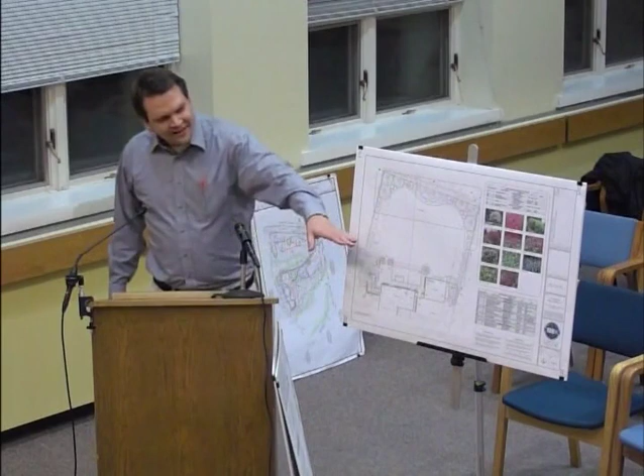The soil scientist did his testing and told us that the wetland line is basically right at the back of the garage, which means the entire back lawn was deemed wetland.

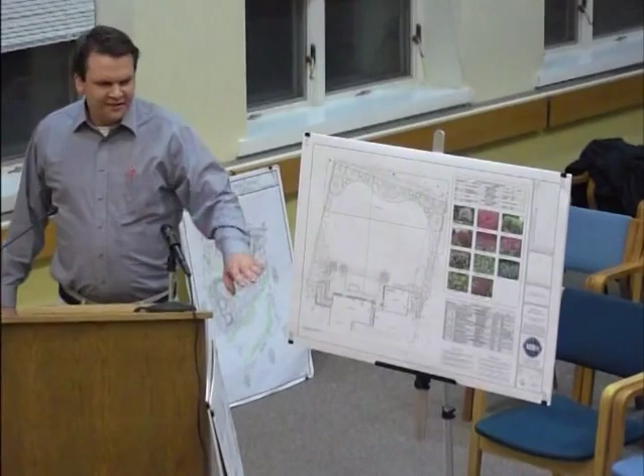There's three main things we'd like to propose for this project. One is a swimming pool tucked up against the back of the house, a vanishing edge with a spa and an auto cover, very nice. It's really going to be taking the place of the existing patio that's there now.

The second component would be a very nice and extensive wetland mitigation planting plan. We're going to remove a lot of invasive plants like wineberry and Euonymus from the site as a whole, do a very nice, beautiful wetland planting along the back, and also redo a lot of the plants around the house itself.

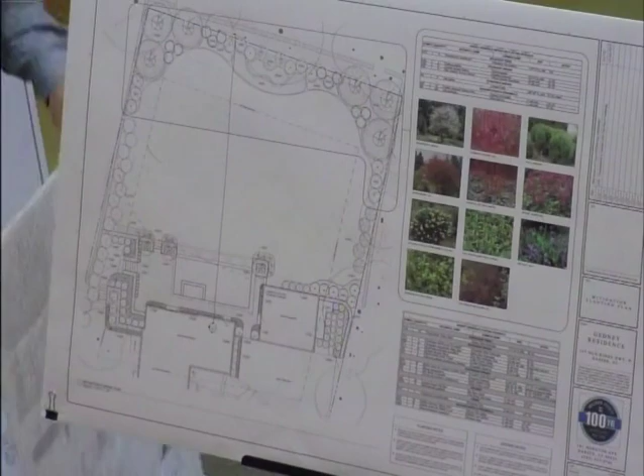The third proposed component of the project is this very extensive drainage plan. The site was not as simple as just throwing some Cultec in the ground like so many projects. This is a little bit more than that.

Right now, the way the site drains, the entire property drains to the backyard. The water just pools up and percolates down. There's no real release into any adjacent properties or a stream or anything. So we're trying to pick up as much water as possible and get it underground. In the front yard, we proposed some Cultec to pick up the roof runoff of the main house. On the side, we're going to pick up the garage roof runoff and put it into some Cultec as well.

The pool patio, which is actually pretty minimal, is replacing the patio that's there now. We're going to do a big gravel dry well under the patio as some retention. And then there'll be two large level spreaders across the backyard, which will help disperse the water and allow it to sheet into the back lawn like it does now.

So I think that's a pretty good summary of what we're proposing.

So you're going to move into the upland review area by about 270-something square feet? Yes. The pool right now is primarily in a spot that already is at house level, about 2 feet above the rest of the backyard lawn. There's one triangle of the pool area that is actually over the wetland line. The rest of the pool project and masonry is outside of the actual wetland line.

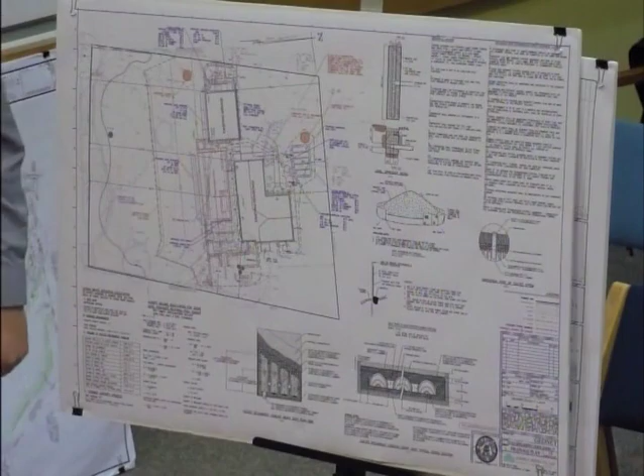So it's sort of an exchange of a small sliver of space for this very large wetland mitigation planting, which is going to be quite an improvement from all the Euonymus that's there now.

Jim, you have any questions? No, this plan helps me see that little angle corner of the pool you referenced, in exchange for this, which at least on paper looks quite handsome.

And where all those proposed native wetland species are proposed, that's also wetland? Yep, this whole area from the back of the house all the way back. Right now it's grass, and there's a patch of pachysandra in the middle of the yard. That's it. So from a wetland planting point of view, there's really nothing, it's just lawn. And that's the way it was when the current homeowner bought the property.

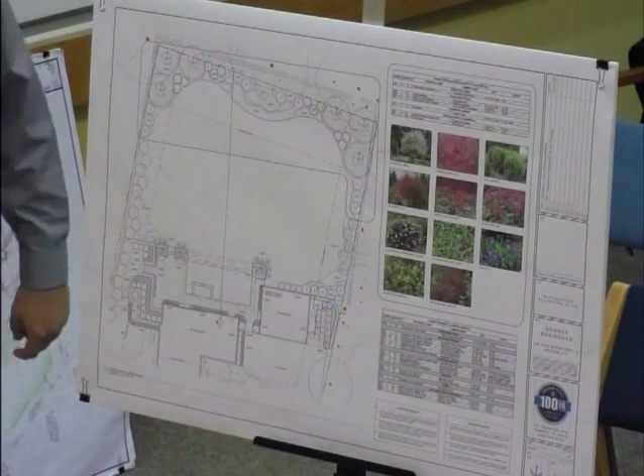And am I right that the large dotted line that extends right across the corner of the pool is a wetland delineation? No, this is actually a building setback line. The wetland line starts here behind the garage.

It's quite a surprise, I might add, that the entire back lawn was deemed wetland.

When was the house and garage built, do you have an idea? I do not. Long before I moved in. When did you move in? Over 10 years ago, probably. I think it's an older property than that, if I had to guess I would have thought it was older. 60s, probably. Okay, yeah, it is.

The garage, I think, was... I'm sorry, if you're going to speak can you come up to the microphone, you become part of the record sir. Please state your name and address. Gedney. Thank you. Yeah, the garage has to have been there at least 10 years prior to us moving in, just by the look of it.

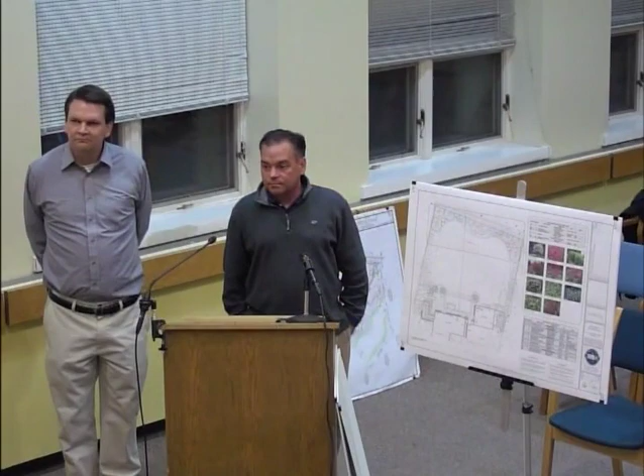All right, does anybody have anything? Michael? Susan? Anything? No? Okay.

When do you propose doing the project, once you get the approvals? As soon as possible, could you do it now? We might be able to do it and open the hole in the fall, or in the spring, in a few months.

One other question is this is the finished product, what we're saying. To dig a hole for a swimming pool, I imagine you need some pretty serious backhoes to go down and dig whatever feet you need. So how's that gonna affect the wetland? Are you gonna be in the wetland with these large machines?

Yes, to some extent. We will have an access road. If we come on the side of the garage here, there's already asphalt over here, so we're going to come along the side of the garage and turn. We'll have a gravel access road across the back of the garage to get to the pool site.

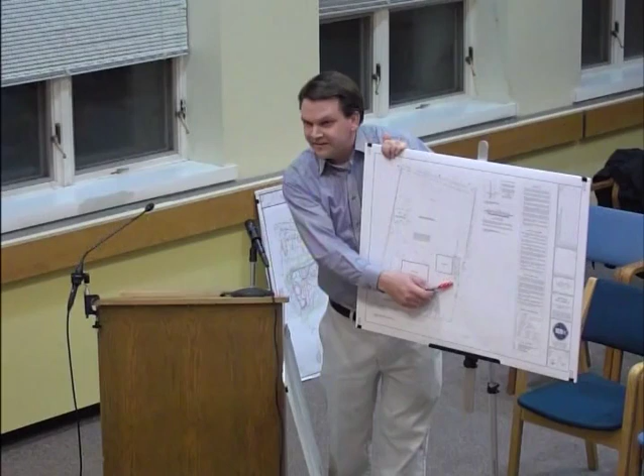When we dig the pool, we're going to be going right from the excavator into a truck, which is going to haul that fill out of here. Any other fill that's brought in is going to be for topsoil, grading, and plantings. So I think any real damage to the existing wetland will be confined within one roadway width of the back of the garage that is there now.

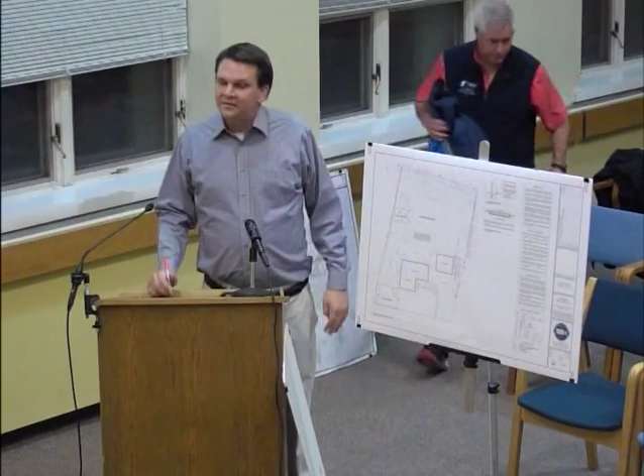And that'll be picked up then, once the pool is done? The gravel that you're gonna put there, are you taking it up? Yep, the access road will be fully removed.

We will have to install the level spreaders, which is really just a long gravel trough with an exposed top, and then finish topsoil and seeding the whole backyard, really. We will have to do some minor adjustments, less than 6 inches of grading, to make sure the level spreaders work and distribute downhill. So it's pretty minor. And then also the big planting along the back should be done mostly by hand.

All right, when you come for the public hearing, we'll get into what remediation you plan to do with all the grass and everything else. So I'd be very interested in that.

My role in this project will actually be the construction of the pool itself. We have a landscape architect named Sean Walters who did the planting plan, he would be better able to speak to that, and he will be at the hearing. And who designed the drainage? Joe Rizzoli helped us with the drainage plan.

Okay, thank you. How deep will this thing be? The pool, I think we were at 6 or 7 feet at the deep end, so not too bad. Actually, the pool patio level is about 2 feet above the backyard grass level there is now, because there's a little stone wall, which is pretty much the delineation of the wetland line now.

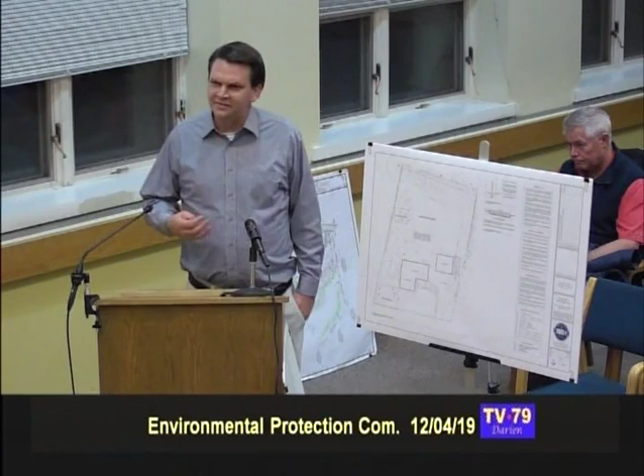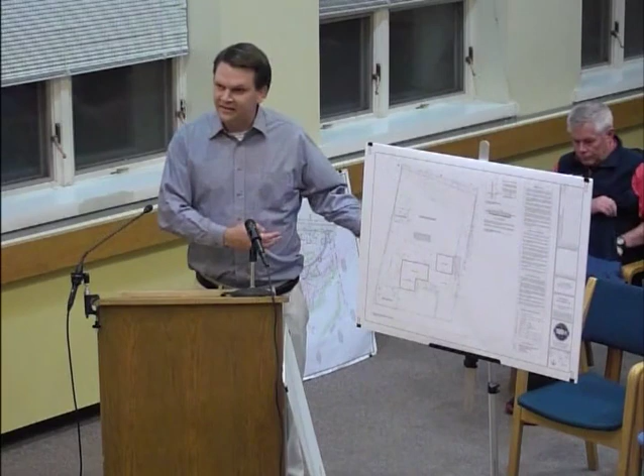Well, when we encounter high water table or groundwater on our pool excavations, we will install a dewatering pit. Just a pipe, say adjacent to the pool hole, that'll go underneath the proposed pool with some gravel, so then there'll be a pump constantly sucking water from the bottom of the excavation, and we'll just distribute it into the lawn in the backyard. It's pretty standard practice, dewatering pit.

Rich, is it acceptable to dewater this? This is in an upland review area, but I think I'd still hold the same candle. Would it be acceptable to dewater onto the wetland?

Yeah, if it's temporary, and during construction presumably. You're dewatering silted water, it would have to be filtered. It would have to go through a filter sack and up against the silt fence. They'd have to have all the erosion controls in place, sure.

I'm sorry, just to get a compass direction on the map, where is north on this plan? Northbound. Okay, so to the south. The Cultecs are to the north, to the front of the house? Yes, sir.

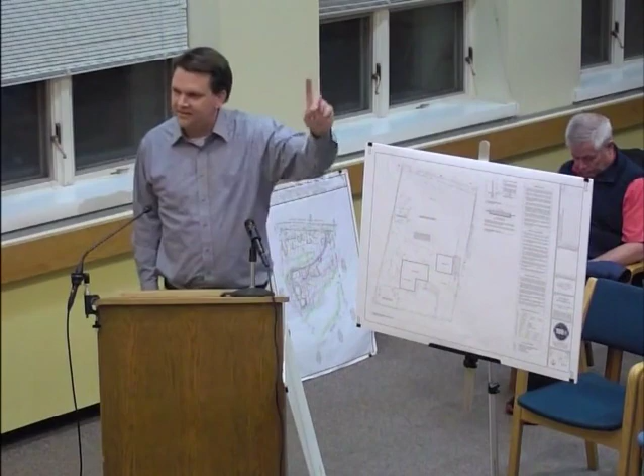So technically, you could dewater away from the wetlands, right? You could have a pit where the Cultecs would ultimately go, and then the dewater would have to be filtered into the wetlands. Well, we could drop the Cultecs in the front yard first. You just have dewatering into a hole, you don't even have to put the Cultecs in first.

All right, well, we'll let you go back and think about that, and we'll await your changes for the public hearing. So we need a solid plan for dewatering? Well, because you're adding and subtracting a significant amount of water to a wetland, we would just rather let the wetland be, because adding and subtracting water is not a great thing, since you're destabilizing whatever is there.

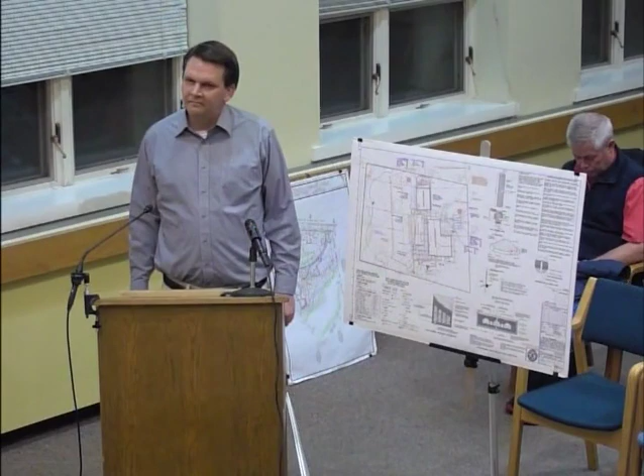Okay, the next item of new business is EPC 48, 2019, 12 Locust Hill Road, proposing new house construction and related site development in an upland review area. The site is shown on Assessor's Map number 64 as lot number 103-7. I refer the members to a supplemental package that was given to everybody.

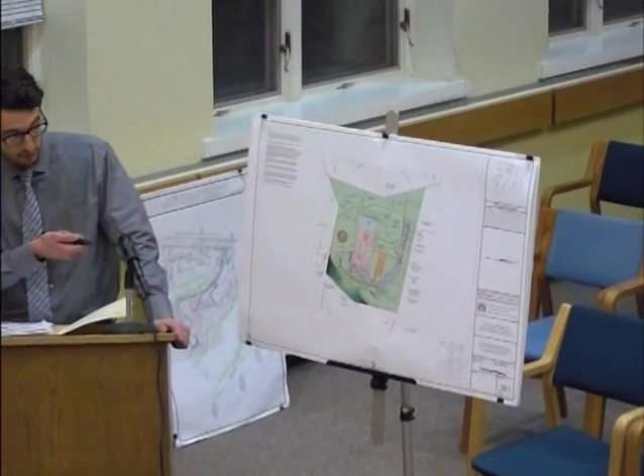The wetlands line is here. There's also a conservation easement on all four lots. On this lot, it is the red line right here. Could you show that? Your marker light's not bright enough. Well, anyway, it is this red line on our plan, it's the conservation easement. And the limit of wetlands line is here. Upland review area is the second red line here.

May I ask you a question right there? Is that the Darien Land Trust wetlands along Delafield Island Road that you just pointed out with your finger? Yes, I believe this property is the land trust here. Okay, and it'll be easier to see on the other plan. Thank you, it's much more pronounced there.

So what they're proposing on all four lots, which is all part of a master plan proposed by Wesley Stout, is to all work in conjunction with each other. All four lots are going to have a single-family residence, pool, hardscape, and driveway.

The properties, I'm not sure if you guys had a chance to drive out there, are all ledge and very shallow ledge everywhere. So on all lots, we had to get creative with our stormwater system, and they're all solid pipe underground systems. Before the water enters the underground system, we treat it with a hydrodynamic separator, and then to throttle down the peak flows before it gets back into the wetlands and watercourse, we have an outlet control structure with multiple orifices and an overflow weir designed for a 50-year storm.

Gunnar, any more? Is this city sewer? Correct. There's actually a pump station down on Andrews Drive. I see where it says proposed water service, is that- The water source is existing. There are 3 meters where that's connecting to. I think there's about 12 meters actually within these 4 lots, so it's all existing up there. All the lots were already stubbed for utilities as well. So it seemed like they were looking to do something, and for whatever reason it just never happened.

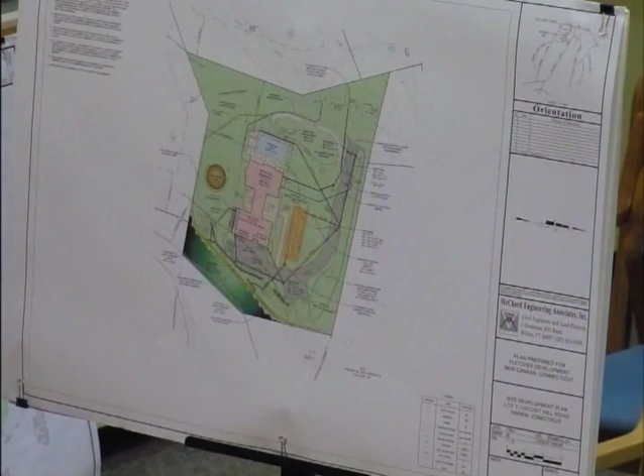Rich, to your knowledge, has the applicant tested the existing infrastructure? I remember there being some controversy with the stormwater management from the prior developer, and this property has been abandoned for many years. Has the infrastructure been tested or verified? Well, no. I'm glad they didn't put the stormwater in. Originally they were going to put a weir across the stream, which is no longer the current thinking of how to do stormwater detention. So it's actually good they did not construct that weir.

Is that the pumping structure? The sanitary pumping or structure? I don't know, maybe you can explain - could you please explain what currently is on site and is it operable?

It is vacant. There's no stormwater on site. All the lots are vacant right now. As Rich was saying, when the subdivision got approved in the late 90s, their proposal was to use the wetlands for stormwater management, letting everything continue to run off and store it in this detention basin they created in the water course and wetlands.

So there was going to be a great deal more disturbance down there. I believe they designed that for a 50-year storm as well. It would have overflowed, and then, same as it does now, traveled on the roadside swale on Andrews Drive to the river.

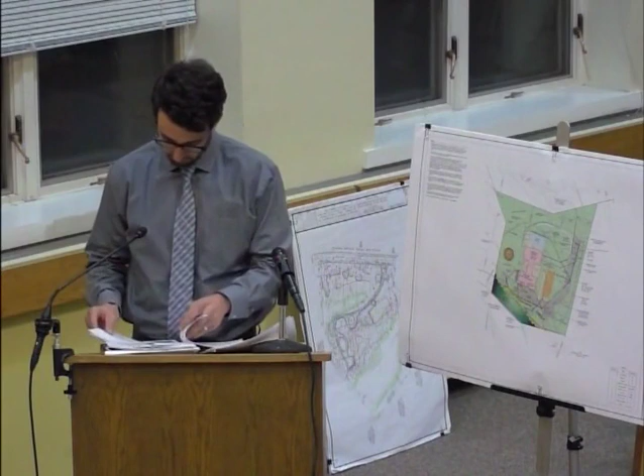I believe 800, but I will double check. The pool is 800, the patio is 350, so 1150 total.

Okay, so that could be 1,100 square feet of recreational area. Well, the applicant just opted to say, yeah, rather than lawn, I prefer to have a pool and a patio.

Well, the idea of removing that pool would be to move the house over, so you understand, you thought moving the house over... the recreational area, we'd be losing recreational area.

Because the slope down here is far too steep for... Is there a way to put the pool on the other side, the east side? And slide the house over?

In the review area? Yeah, well, then you'd have the driveway coming in. Can you flip the driveway? Flip the driveway is what I was saying, getting it, flip the driveway,

Slide the house up and put the pool area where the proposed driveway is. I don't know if it makes a difference.

Or if you had an elevated area that was flat, that's where you'd put the pool, and you had an area at a lower elevation that could be flat also - it's just at a different elevation. You're looking for level area for recreational space.

It doesn't all have to be at the same elevation across the entire lot, albeit desired. I haven't visited in a while, but I've been to a lot of these lots - it's all ledge. You walk out the back and just fall off the back of the lot. Creating a flat area would involve removing ledge. Any construction on this lot will be moving ledge, but that's the prerogative of the applicant to develop the lot.

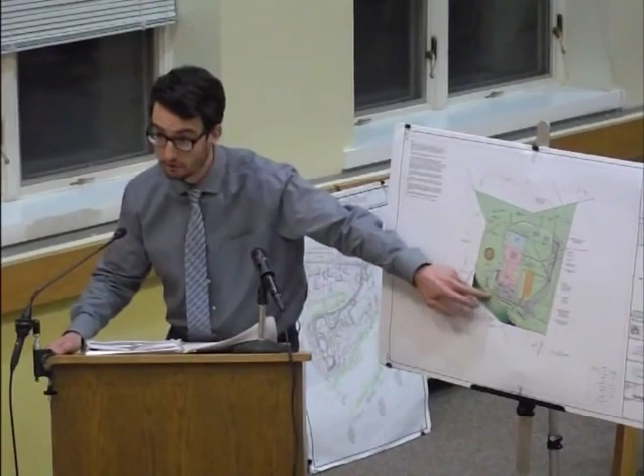It would have to be either east or west, because the building setback line for the pool is this line right here. Yeah, that's right along the side. I guess what I'm getting at is if they move the house out and don't have a pool, someone will be coming back to you in the future saying, can we have a pool in the upland review area? And the answer would be, are you impacting the wetlands? If not, what is the reason why you can't have a pool there? And you'd be trying to find a reason why it can't go there.

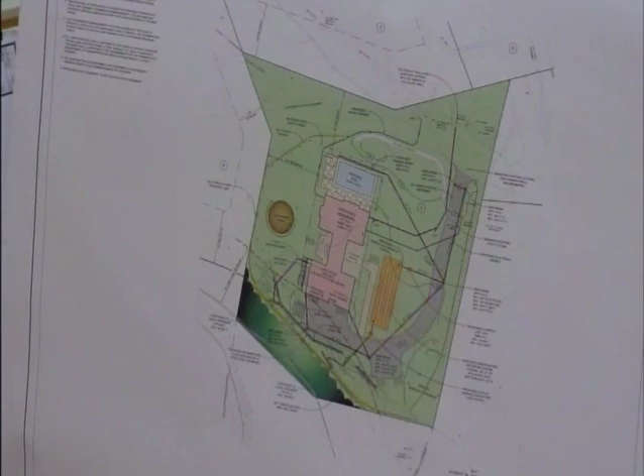Right, and we figured the pool on the west side would be the least disturbance to the wetlands, being the furthest away it could be installed, because we're going to have to excavate much more there than for the driveway construction. Yes, I see that.

I think we should have a public hearing, just out of deference to the land trust and from a personal perspective, but I'm one of seven, so I don't know. Gunnar, what do you think - should we have a public hearing on this? I think it would be a good idea, absolutely. Ken? Yes. All right, let me have a motion to have a public hearing. Thank you, Gunnar. Second, thank you, Kelly. All in favor? Aye. Okay, so that's what we'll do.

On to the next lot? Yeah, let's go to the next lot. The next lot is EPC 49, 2019, 14 Locust Hill Road, LLC - proposing new house construction and related site development in the upland review area. The site is shown on Assessor's Map number 64, lot number 106B.

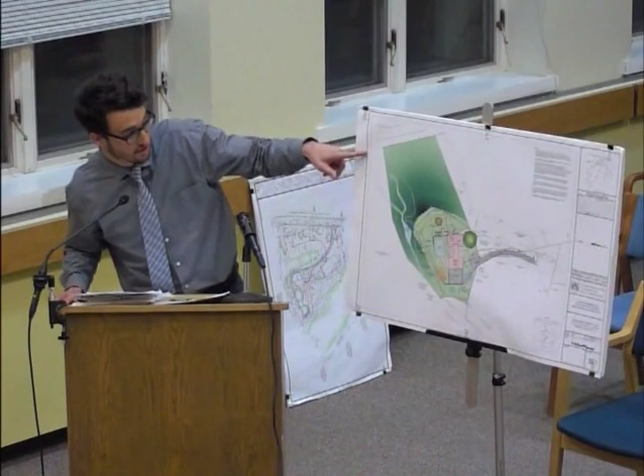This one has a much larger conservation easement. The lot itself is 1.4 acres, the easement itself is 0.9 acres. You can see the same red line delineates the easement in this location. The detention basin I was talking about on the last one - you'd be able to see much more on this plan - would be located in this wetlands and watercourse here, with the weir constructed adjacent to Andrews Drive. So this would fill up during storms, create a mess, and then spill over to Andrews Drive and follow its way north to the river.

What is the relation to the other property? The other property is located right here.

Same thing as the other: single-family residence, pool, hardscape, driveway. The wetlands line for this one is right here, and the upland review area line is here. So again, a small portion of the driveway is within it. Level spreader again to achieve gravity flow from the stormwater system and erosion controls. On this one, the stormwater system itself needed to be located in there to capture the driveway and the house. It was the only location on site, as you can see.

We didn't have much area over here, another tight lot. I believe this lot was actually developed before, with the house in generally the same location. I'm not sure when it was demoed, but there was a house on this lot. It was one of the four that were actually developed, I can tell.

So at the end of the day, what I see here, you're gonna have a driveway that's part of the upland review area, correct? Yes. What I'm trying to do is define the disturbance to the upland review area, and that's part of the driveway? That's part of the driveway, that is the stormwater system, and part of the patio in the level spreader. Where's part of the patio? I don't see that. Right there? Oh, okay, so it can't be more than 50 square feet. Small area. Okay, thank you, got it.

And this one, the driveway on this one actually passes through the previous lot, lot 7, but there is a driveway easement established, as the property line for this one is right here, so there's an easement in place to be able to access that cul-de-sac. Again, served by the sewer, same water, same electrical services that are already installed. House is pretty much the same size, same footprint.

Is this a retaining wall around the whole thing? Around the backside, yes, that is a terrace retaining wall. Those are both 4 feet or less, so those ones will not need to be structurally engineered. And the slopes fall off fairly steep towards Andrews Drive, right after where that retaining wall is located. There is actually an existing wall already out there — this wall right here, it's shaded a little lighter. That wall is existing, and I want to say it's about 14, 16 feet tall, very tall.

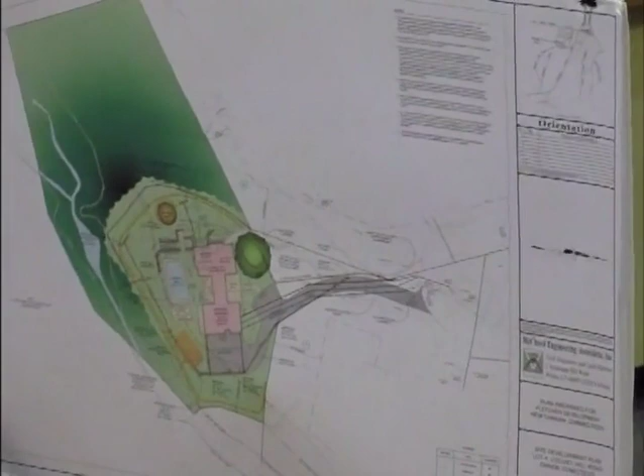What is top of wall on that, on the existing? 76, and bottom of wall is about 63, so about 13 feet tall. And again, that wall is existing.

And the sewer easement for this, just for your knowledge, goes from the cul-de-sac all the way down through here to Andrews Drive, with the pump stations on this lot right here. Again, all topo goes to the south towards the existing water course. The existing topography all slopes north to south towards the wetlands and water course, where all the existing runoff — there's nothing capturing it, it's just sheet flowing over the ledge and through the woods down to the water course.

So again, we're throttling that down with the underground detention system, solid pipe, no infiltration, with the outlet control structure, and putting it into a level spreader to promote sheet flow down to the wetlands. So we didn't want to daylight any pipe and have any point discharge. Again, trying to protect the wetlands as much as possible.

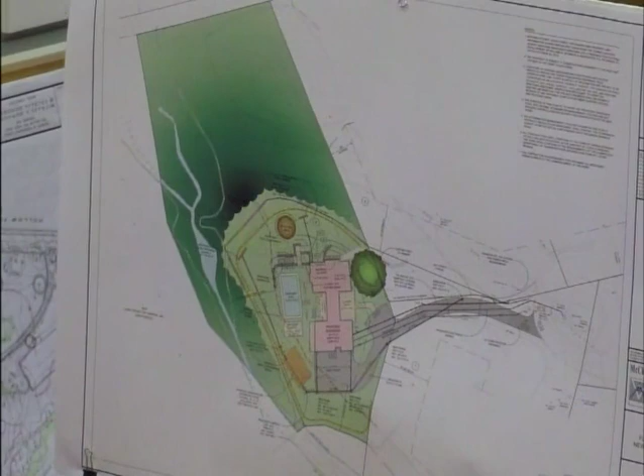What is the area on the lower part, below the house, that square, where it says roof leader across? It's labeled here. No, the other end, down to the bottom. It's driveway, gray, below the pink. That's driveway? No, below, just attached to the house. Next to the orange? Yes, that is just a pergola patio. It's a patio for all intents and purposes. Is that impervious, or what are you gonna make it, or haven't you decided? Yeah, that'll be impervious — that's the driveway, no roof though, it'll just be a pergola roof on it.

The entire house and the entire driveway will be captured. That'll be allowed to sheet flow.

So just to clarify, the short wall, the first terrace wall, that is top of wall 75, yes, that has a little hook around the proposed pool, yes. That hook on the southerly side, that is the limit of the 50-foot setback. Yes, for the whole area, the red line that's shown here, that's the same line that you're looking at. The back of that wall is pretty much on the setback line, and we'll fade into existing grade because the pool is at 75, which is the existing grade there. And that continues across, cuts the patio, and then also cuts the driveway.

Is that where the garage entrance is, where you have a square? Yes. And the cars would pull into the garage, which is what you have shaded pink, correct? Yes. Okay, just trying to understand.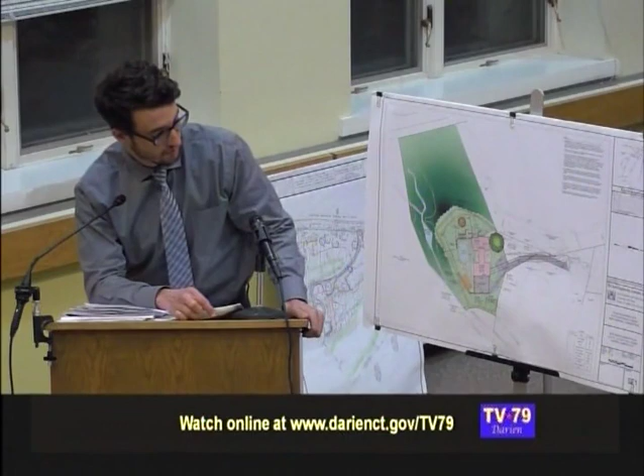This retaining wall? No, I'm at the driveway. This map has a lot going on, so I'm pointing to that catch basin right there. Okay, and then this retaining wall, this stone wall, is that a stone wall, or is that off property? Is that silt protection? That's silt protection on our property. There's a wall off property.

Okay, so you're at plus or minus 70 there, right, with the silt fence? At the corner here, it actually looks like it's 80. So that's a bunch of ledges coming out.

And so now we're down at the limit, I'm just trying to figure out what the elevation of the limit of wetlands is. Are you still at about 70 here? Just trying to get an idea of where it all is. It looks more like 60 at the limit of wetlands. Yeah, 60, 61.

So there's a material change in gradient on this side? Yeah, once you get out of the building area, there's pretty significant slopes down towards the wetlands.

So how much filling are you doing to construct the house? It's actually mostly cut. There will be blasting that occurs. I believe they are submitting a blasting plan, but it's all ledge, so they've got to get the foundation in, and it just worked well to get all of the houses into one plan. So is there a blasting plan for the prior application? I believe for all four, they did it all in one.

Well, so the basement on this one is at 65.8, and the existing grade at the high point of both of these properties is about 78. So there's 10 feet of cut, or I guess on this one, yeah, blasting that is going to need to be done.

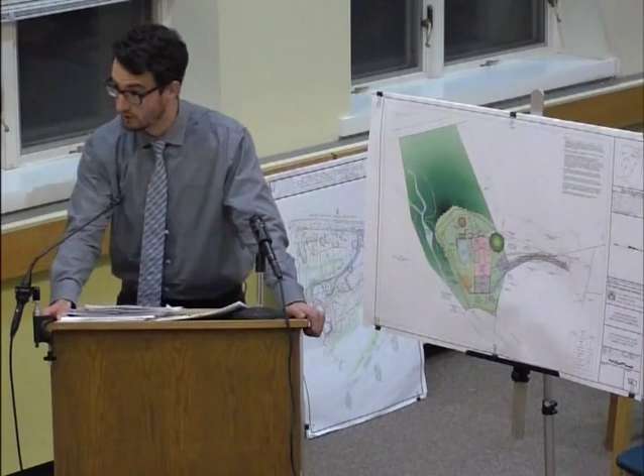I'm not sure what they propose to do on that yet. I don't think we've gotten that far, but it is something that's going to have to be looked at for the course of construction. I think we might want to know that answer.

Do you know how much cubic yard material is going to be excavated off the site? Not off the top of my head, no. I think that would be important for the commission.

Well, I know a lot. They're going to retain a lot of it on site to build the walls. A lot of the walls are going to be built with boulders from the site as a result of the blasting. Otherwise, they will be hauled away. I understand that, but what I'm asking is, what's the order of magnitude? So when you come back, you should speak to that. Okay.

Kelly, Bill? All right, would this be part of the public hearing, or would this be a separate issue? This is a separate application. Separate, okay, should we go for a public hearing on this also?

You still got the land trust issue, so can't you hit them both at the same time? They'd be next month, so the next public hearing would be next month. All right, so can I have a motion to move this to a public hearing?

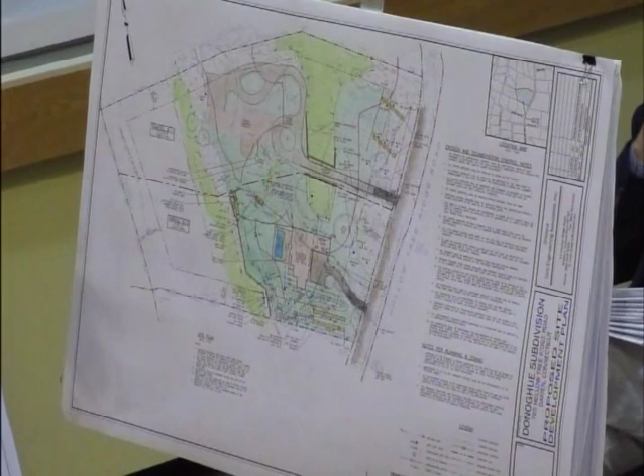So what we're proposing to do is a bioretention area south of the house. We'll have the runoff from the driveway and part of the roof area going into the bioretention area, as well as the patio around the proposed pool, to collect that water, treat it, and then meter it out to a level spreader, and then out towards the wetlands.

We've also provided a small detention area for about a quarter of the house for the roof area itself, and then we're providing detention for the footing drains, as was asked by the commission. Those are really the main changes.

Some of the minor changes was adding the stockpile area, revising the grading on the driveway, the lower driveway. We're keeping—if you've been out to the site, there's like a little island, two entrance ways—we're closing one off, keeping the other one, so we're not really touching that driveway grading-wise. So we made sure that was taken care of.

We removed the catch basins in the driveway, because now we're allowing everything to sheet flow across the driveway into the bioretention. That's why there's a little swale to collect that water so it doesn't go over the septic system, then drain down into the bioretention area.

We've got Matt Pop here, who laid out a planting plan and mitigation for the wetlands itself. We beefed up some of the silt fence and hay bales around what Joe had asked us to provide around the two wetlands areas, adding stake hay bales with silt fence around the wetlands area on the west side of the house. And we also added the proposed patio around the pool.

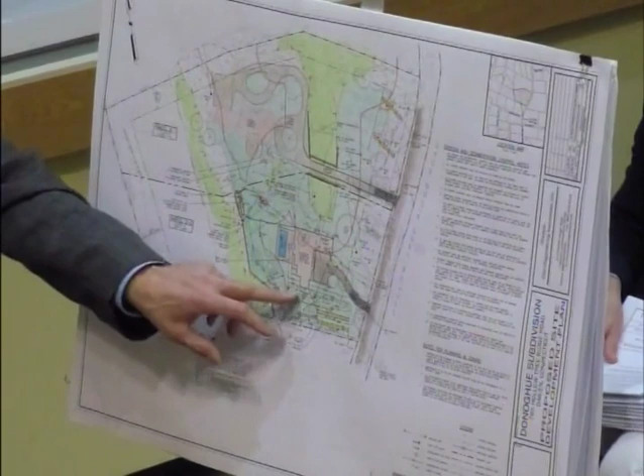We also provided water quality volume calculations, and that relates to the detention. So the first foot or so, or 6 inches of water, that's our water quality volume. Anything above that is detention. We're providing a control outlet through a little weir system—basically take a D-box and create a V-notch weir to control the 2, 10, 25, and 50-year design storm. Joe has reviewed all that, and I believe you've got a letter from him stating all his comments have been addressed.

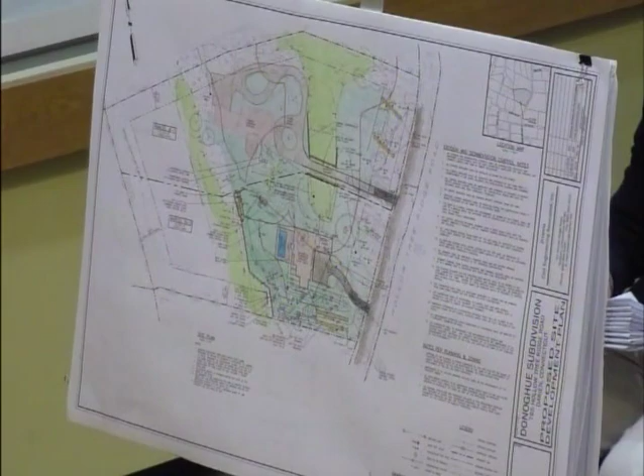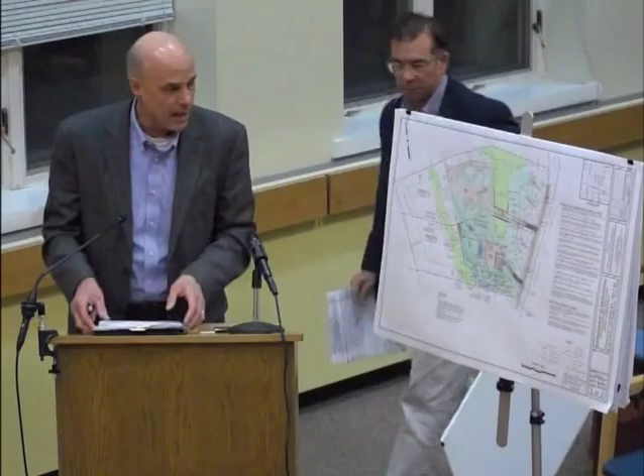Those are really the main issues that we talked about, those are the changes that we made. The plans in front of you right now are the revised ones, what you see on the board here, and also a letter addressing Joe's comments from the 1st of November. At this time, I'd like to ask Matt to come up and go through his mitigation plans and the planting plans.

Did the wetland creation go away? The wetland creation areas? Matt will go over that. It's not on here. No, it's on the landscaping plan. That's this one.

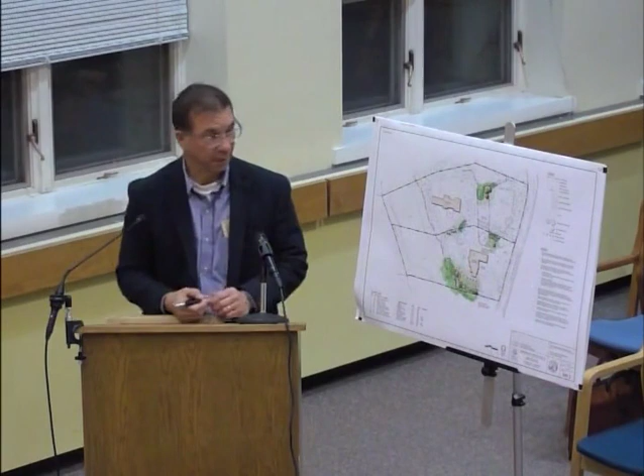Good evening, Matthew Popp, landscape architect, professional wetland scientist, Environmental Land Solutions. At the last meeting we had two mitigation areas. Here's the wetland finger right here in the center. One was right here where we were lowering the grade to match the elevation of the wetland. That mitigation area stays the same. And then the bioretention area that was over here was shifted down to this area right here, and it was enlarged in size.

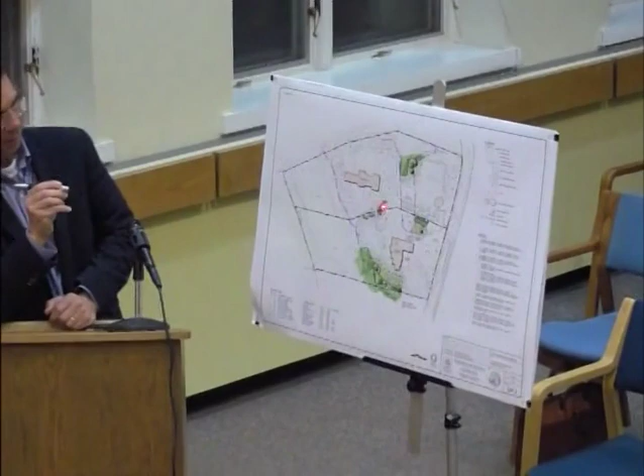We were asked to see if we could do mitigation on the northern property, since the wetland disturbance is on this property. So I went back out to the site. In this area there's a wooded area, and there's kind of a meadow area. In this meadow area, we're adding three swamp white oaks. On the northern site, there's a small, narrow wetland corridor. There's a pipe that runs from this wetland across and discharges here, and it flows through this corridor. This drainage swale is mainly just a lawn area, so we replanted it with native shrubs.

So we have four areas now, one, two, three, four. The mitigation to wetland disturbance ratio, or wetland creation to wetland disturbance, is about 2.5 to 1 now. Before it was about 2 to 1, and I think that's being conservative. This wetland area down here, which I was taking credit for, is probably going to be larger than what I had. So that's it quickly. Any questions, I'll be happy to answer them.

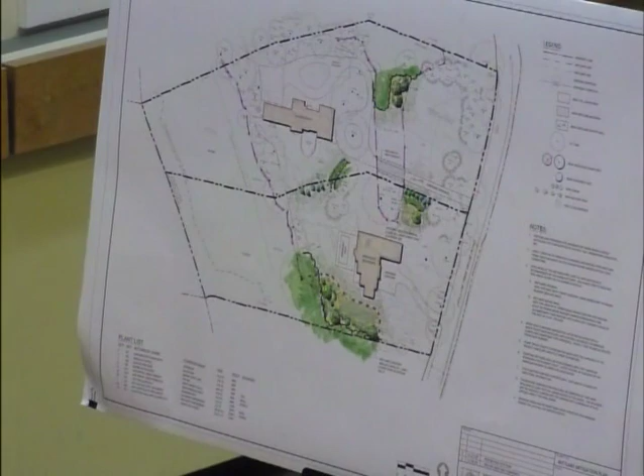The neighbor's concern to the south, she has a little pond there, down here. I just want to make sure her concerns are addressed. Yeah, we believe with this change it is, but I just wanted to confirm.

Right, yes, we did. I think she also had some questions about adding some more trees and stuff like that, and I think Matt has done that with the bioretention area down here, adding some more vegetation and trees. Again, we're controlling the water on our site, so really we're not increasing the runoff off-site. So there should be no impacts to her property at all.

For the new house perc test, how deep before you get water? The existing house there, I think we were down... the new house, I thought... yeah, the old house was at the top, this is the existing house, this is the proposed house. We were down, I think we were at 37 inches on one of the test holes.

Let me pull my plan up again. 37 inches to test hole 107, there to mottling. Mottling is an indicator of seasonal high groundwater, potential seasonal high groundwater. We really didn't hit any physical groundwater at that time, so about 37 inches down.

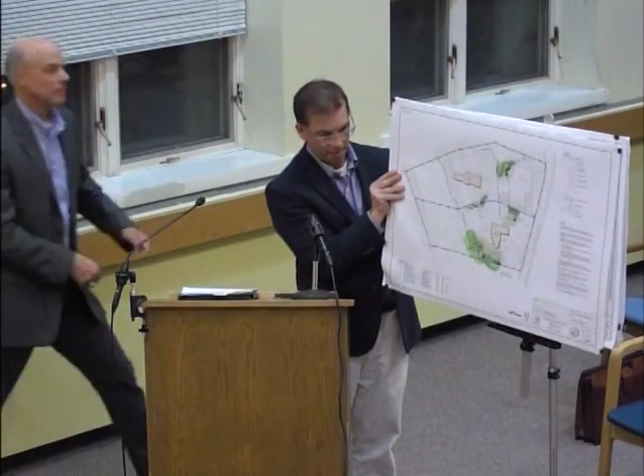And their adjacency to the proposed new residence - does that throw any curveballs at us once that wetland you designated, which sounds like a terrific exercise, is established? There's particularly on its way to that pool, that pond, natural pond that the neighbor commented on. I did propose along the edge of the wetland bioretention area a boulder barrier so there's a distinction, which I think you show - there's stones, the boulders are here, so you can tell where the limit is, where the lawn is, and where the natural area starts.

Yeah, because without those I think I would be concerned. Thank you. Do you start another 50 feet from that though? That's really what I'm wondering. That shouldn't be the curveball I was asking about, but you do, yes - once it's established. Yeah, it would.

That's why it's a big deal, Bill - that was the reason for the question. Yeah, because if all of a sudden they establish a wetland and we're building within a potential upland review, it's not - it would be after the house is established and after the wetland's established. So if that house went away, the next house coming up would have to be 50 feet further away. Potentially, yeah - I would hope it'll last a while. But if they wanted to change their deck or do some small addition or bump out, they might be dealing with an agent approval, or they might be coming back for a wetland permit, yeah.

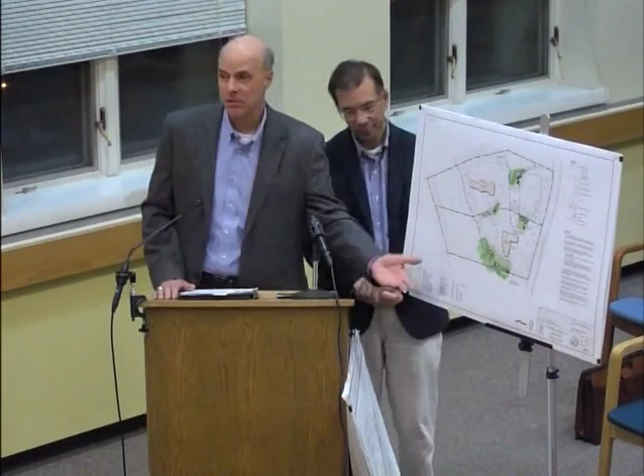To the drainage through that pond? Well, we'll have a benefit because we're improving the water quality, the quality of the water running off the site. Right now there's nothing out there—a lot of driveway area, house, a lot of impervious areas. We're reducing the impervious area, but also collecting the water and treating it before it goes through the wetlands we're creating. We're also reducing the volume, or the peak flows, leaving the site.

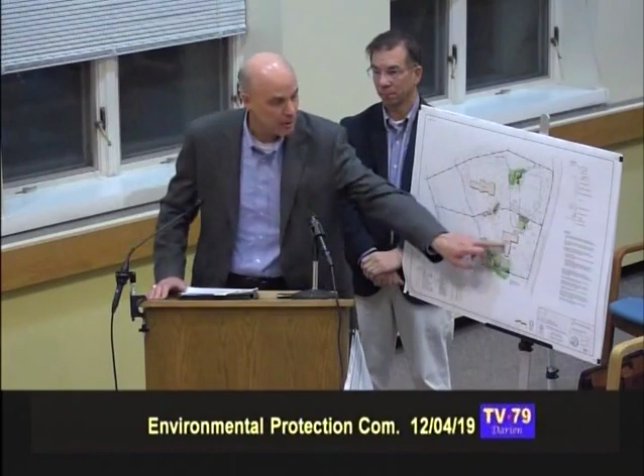And there's an existing tennis court right here. Yes, and there's nothing on that—that's 7,200 square feet alone, a large area, plus the driveway that went to the property, so we're taking a lot of impervious area out. Thank you.

Anybody else have anything? Okay, we'll talk about this later then. Go to deliberation. Okay, the next.

Closing the hearing? Yeah, okay, sorry. I don't see any public here, so all right. Can I have a motion to close the public hearing? Somebody? Thank you, Susan. Thank you, Kelly. All in favor? Okay, thank you, thank you.

Thank you, Doug. The next item of business is EPC 43-2019, Town of Darien, Weed Beach Park, 155 Near Water Lane, proposing trail construction in the upland review area and wetland restoration. The site is shown on Assessor's Map number 56 as lot number 3-10.

My name is Jack Grieshober with Weston and Sampson, here today for a public hearing for the Weed Beach project we went over last month. Spell your name for me? Grieshober. Thank you, no problem.

So just a quick recap here: the area we're looking to review today is this multi-use asphalt trail that runs through the back area of Weed Beach Park, as well as the boardwalk in front. There are some minor parking improvements in front of the existing beach house. And as a reminder, this area we've been calling the Short Lane parcels was previously approved last year by the board.

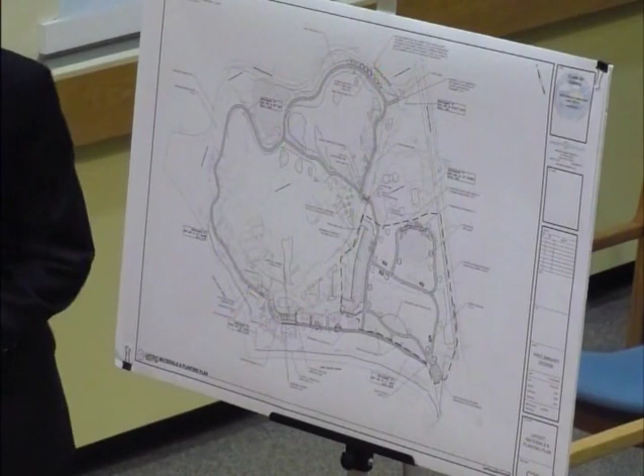The disturbance is basically—if you see this bold line here, that's the limits of the tree line, and I believe in the package we sent you last time there's a limit of disturbance line as well. It varies a little as you go along the path, depending on how far out we need to extend the grading to allow the path to be constructed. It can be anywhere from 2 feet wide; some areas are wider, and here we've got a bit more of a wide spot as far as overall disturbance area.

Yes, please—I went down there today and it's very difficult to figure out where the path is. I was hoping they might have put a perimeter or some kind of marker through there, but there wasn't one, so I had to guess. One thing that concerned me on your demolition plan: it's a very wide clearing and grubbing area, almost 50 feet wide, in order to get the 10-foot area in there. That seems like a lot of disturbance to work with.

Unlike when I went up to Tilley Pond Park—that came out very nice, very little disturbance along the 5-foot path there. So it's a little concerning that all that disturbance could happen just to put this in. And there was also no identification of any trees along that section coming down through there, which I thought was odd because you had them noted on the other side.

There are some very large oaks situated amongst this big disturbance area, so I'm wondering why that wasn't put on the plan. Also, I didn't see any 50-foot marker from the wetlands on this plan, or 100 feet from Holly Pond, which would cross over the street into that location, just to show a reference of where these 50-foot and 100-foot marks are.

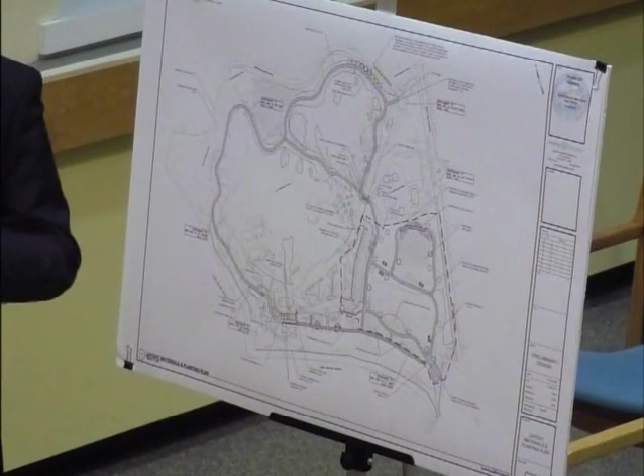But if you take a look and take a little ruler and figure this out, this is pretty darn wide for that whole section, and you took your time to mark out where this was, so it wasn't just random. Right, but it's very, very wide. Correct, yeah, and the alignment is because that seemed to be the best path to get the compliant grades in there while minimizing the amount of disturbance.

There's some parts on the site, if you were walking, you'll see that are much steeper than others, so by picking the more gradual areas it was our intent to reduce the amount of impacts and the amount of clearing needed.

What is the ADA compliant slope? Typically 5%. You can exceed that for short runs, but 5% or below is the preferred slope.

And so did you, per the plan - the plan does show a material amount of disturbance. How many 5% grades do you need to manufacture to complete the path?

I'd have to check the grading plan itself. I know some of these areas are closer to the 2 and 3% range. There are a couple areas where we go up to 5%, and I believe there's one area right in here where we exceed it for a short run, just to make the path.

So if you're looking at this map - the demo plan. Is this the demo plan? Yes. Where there's wide berths is where you have to make your grade, right?

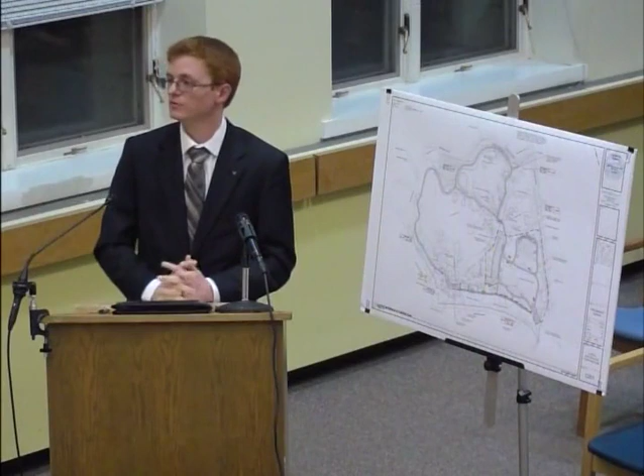Yes, we did look at those products. We talked to the manufacturers, and they had some issues, especially on the sloped areas, having it kick out and wash out and rut. So as far as maintenance goes, it was still going to be more to maintain. If you get the gravel out of there, you get lots of gaps and holes, so it's no longer compliant.

So let me ask this question, does the entirety of the path have to be asphalt? Well, the entirety of the path is intended to be an ADA compliant, multi-use trail. So rather than have a lot of material breaks, which can be uncomfortable, keeping it one material allows it to meet those requirements in every location.

So when the asphalt pathway cracks and breaks and heaves, which it will, is it ADA compliant at that point? At that point, no, you'd have to go replace that patch, but that will happen less frequently than, especially as I mentioned, some spots creeping up on that 5% slope, which makes it highly susceptible to washout and rutting. So the maintenance of repairing a small patch is going to be far less than going out there constantly to regrade, recompact, and bring in new material to fill in what's washed away.

Any other questions? Maintenance in the winter, is anyone going to be plowing this, putting anything down, or in the wintertime is this just left natural? That would be a town decision, whether or not it would be maintained year-round.